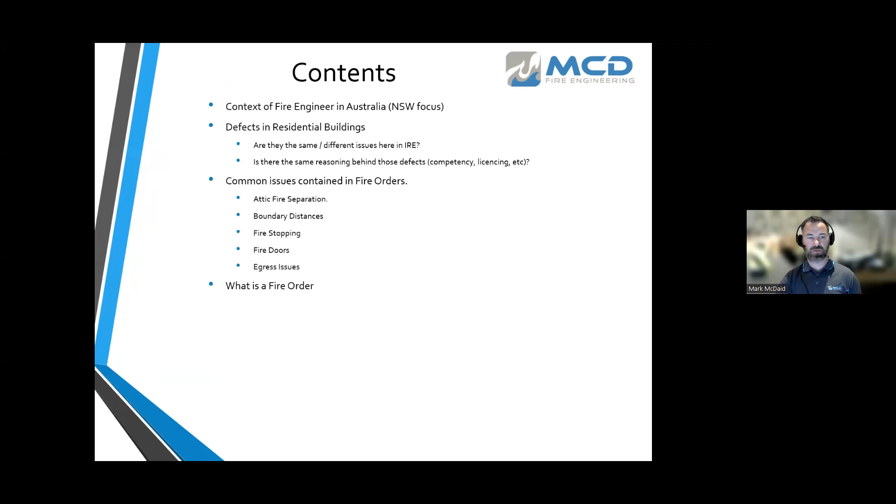At top level: attic fire separation, boundary distances between buildings, fire stopping, fire doors, egress issues. We'll look at what an actual fire order is, what's in a fire order, and how and when one might receive a fire order.

What if everything complies with the original as-built docs? What do we do in those cases? What legislation applies? Can I appeal? Can I ask for dispensations? Can I ask for concessions? And where does the responsibility fall, whether it's a fire brigade matter or a non-fire brigade matter.

And how would one comply with a fire order, and the pros and cons of receiving a fire order? By the very nature of receiving a fire order you'd think they're all cons, but there are some pros. We'll end up with some conclusions.

A little bit about me before we get started: 21 years as a fire engineer, working purely in fire engineering all those 21 years, working as an expert witness in New South Wales Supreme Court proceedings on both combustible cladding and residential defects. Graduated in 2003 at Letterkenny, worked with Michael Slattery Associates from 2003 to 2012, then in 2012 moved over to Australia. A couple of years later, set up my own business called MCD Fire Engineering, and sit on various groups and professional boards as an education and training subject matter expert on the panel that assesses chartered engineers in Australia, and recently just got the CEng qualification for Engineers Europe.

So getting into the context of an actual fire safety engineer in Australia, it's somewhat different to what we're all used to here in Ireland.

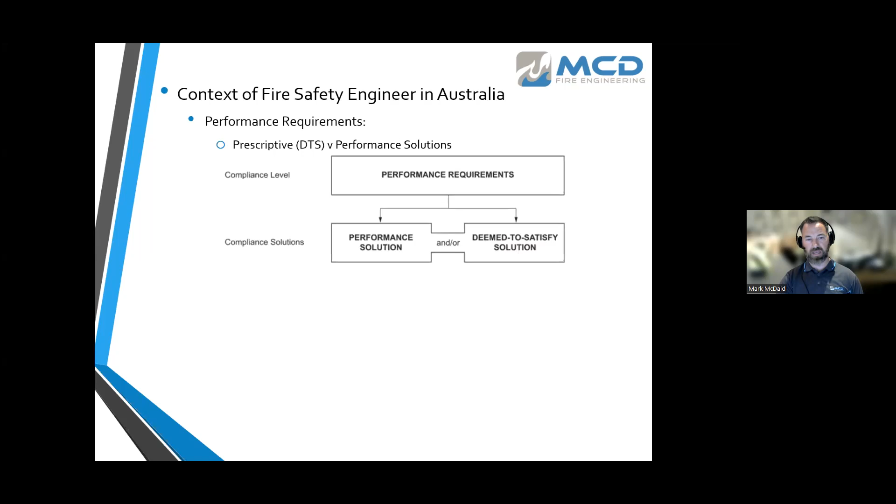To give you an idea of what it means to be a fire engineer in Australia: there are fundamental performance requirements in the Building Code of Australia, or the BCA. Think of it as the collection of all the technical guidance documents from A to M, but they're built into two streams under the heading performance requirements. The two streams, which can be done in parallel, are a performance solution, where a fire engineer is required, or a deemed-to-satisfy solution.

That's the prescriptive path - there's no fire engineering in that. Essentially, when you have no performance or alternative solution, as the old name would have been called, there's no fire engineer, there's no fire service generally, and there's no what's called an A1 unrestricted building surveyor or a signed certifier, because essentially it's considered a tick box exercise. If you comply with the prescriptive codes, it's a clause-by-clause assessment of the building, and there is no need for a fire engineer.

It's a building surveyor's job, but that building surveyor can bring in, at their own discretion, the fire engineer, structural engineer, mechanical, electrical or hydraulics specialist to assure them or give some guidance. But essentially, the role of a fire engineer is purely to do performance solutions.

When it's brought in, we have strict licensing and registration requirements. Fair Trading, which is the governing regulatory body, basically puts us through the rigor every single year in our renewals.

We have a director's ID, whereby if we leave one company and join another, the ID follows us. So if there's any litigation, it follows that director's ID.

There are ICRIT ratings, basically like scores on doors, as they call it in Australia. It's how good a company is or is not in accordance with the eyes of the regulator.

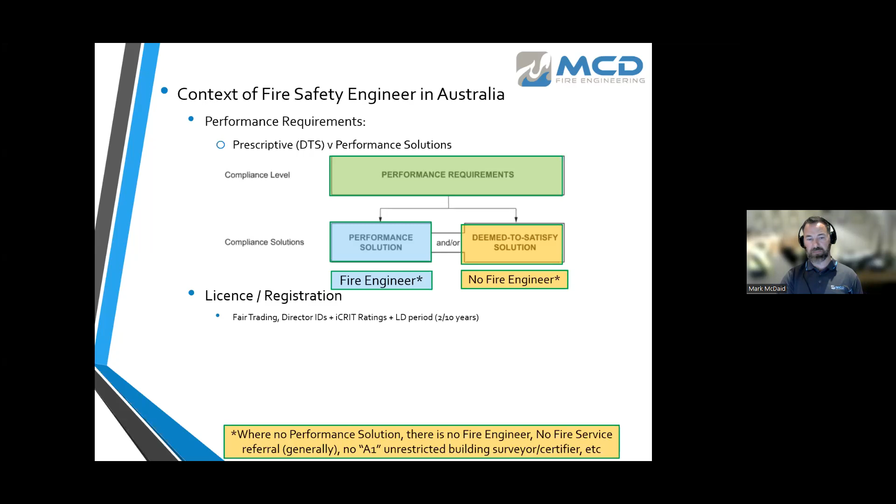And there's the liquidated damages period. For buildings that are built, there traditionally used to be 2 years liquidated damages. Now it's 10 years. The legislation requirements under the EP&A, the Environmental Planning and Assessment Act, and the DBPA, the Design and Building Practitioners Act, specifically for residential, set out that you need to be registered as a certifier, fire safety grade, a design practitioner, and a professional engineer. So it's not just a chartered engineer, you have to register in various other streams, and you have to have insurance.

If you don't have any of those, you simply cannot work in New South Wales. Other states are a little bit different, but you simply cannot work as a fire engineer or open a practice as a fire engineer. That's the legislative requirement, not even a commercial requirement. They're somewhat different and sometimes higher.

The insurance requirement for a fire engineer, both as a company and as an individual, is that you need to be insured before you can do any project as a fire engineer. And that includes that if you retire today, you carry run-off insurance for 10 years.

And that could, if you play your cards right into retirement, you could put it into the coffers of a run-off insurance policy, whereby you pay somewhere 4 to 6 times that last year's insurance.

Now, given the post-Grenfell insurance requirements, my insurance as a company went from 7 to 150 grand. That's a big bill to pay if I wanted to retire tomorrow. So basically, it's a lot of money, and there's a lot of responsibility on your head.

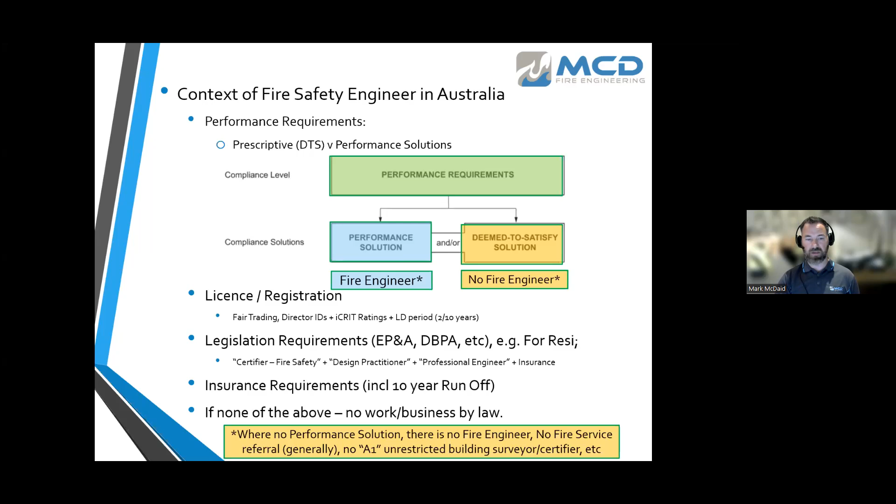So next we look at some of the common defects in residential buildings. Are they the same as they are here in Ireland? Is there the same reasoning? Is it to do with competency of engineers or builders? Is there licensing issues about various trades? And then we can look at whether the route to remediation is best done by the fire order, or what's called a DA, a development application or development approval, which is like a planning permission.

And a CC and CDC is a construction certificate, or for a fit out, for material alterations, it's a CDC. Essentially, that's like your standard fire cert application and commencement notice.

The code of practice for remediation on defects is the Irish reference. We'll touch on that a little bit later. But essentially, when you have a fire order, you don't need planning permission. The council are the ones in control of that fire order process, and they're the ones setting out what needs to be done, how it needs to be done, when it needs to be done, and who needs to be involved in the various stages of that process.

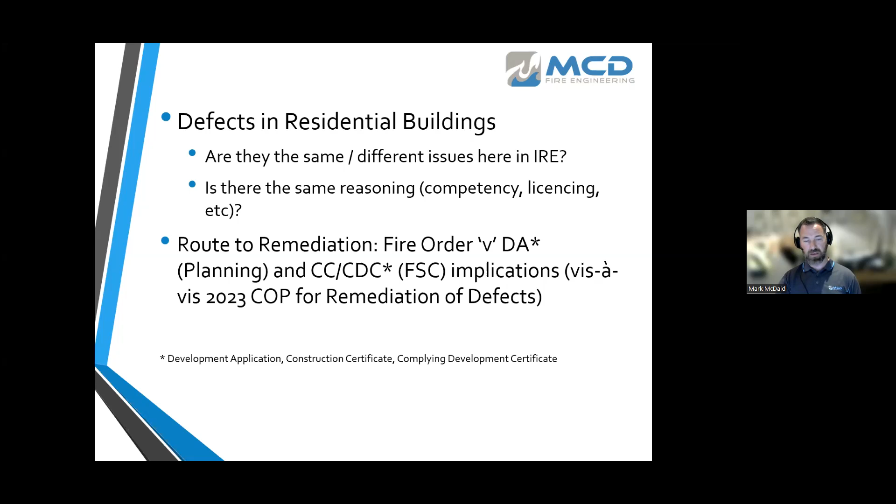So they're very much in control of it. They don't necessarily sign it off, but they're in control of who should sign it off, i.e. a registered building surveyor and a registered fire engineer and all the other registered practitioners that go along with it.

Some of the common issues we'll find are up in the attic at the top floor. The ceiling is either not a fire rated ceiling, or it's interrupted by internal non-fire rated partitions. So you might have bricks and blocks between the units, but internally you might have bathrooms and bedrooms that are not fire rated, and they actually go through the fire rated ceiling.

So you've got an interruption of the fire rated ceiling, and the way it's worded in the Australian system is throughout the entire top floor. That needs to be one uninterrupted ceiling throughout the entire top floor. So if you don't have a fire rated ceiling, quite often the walls are not extended up to the underside of the roof covering, the sheet itself, not the battens or anything else.

The only thing allowed to pass through those walls is a timber batten, nothing else. Fire stopping is pretty much the same here as it is in Australia. There are problems with fire stopping all the time, especially in old existing buildings.

Boundary distances or fire separations: houses in Australia typically are 900 millimeters to their boundary, whereas non-domestic buildings, so flats, apartments, 3-story walk-ups or even 10-story buildings, have a minimum requirement of 3 meters to the boundary. It doesn't matter how many windows are on it. There's no such thing as enclosing rectangle methods, BR 187 or anything else. It's simple: if you're within 3 meters, you fire rate the windows or provide drenchers or shutters, or else you do a fire engineering solution to justify not doing it, or as a reduced form of protection.

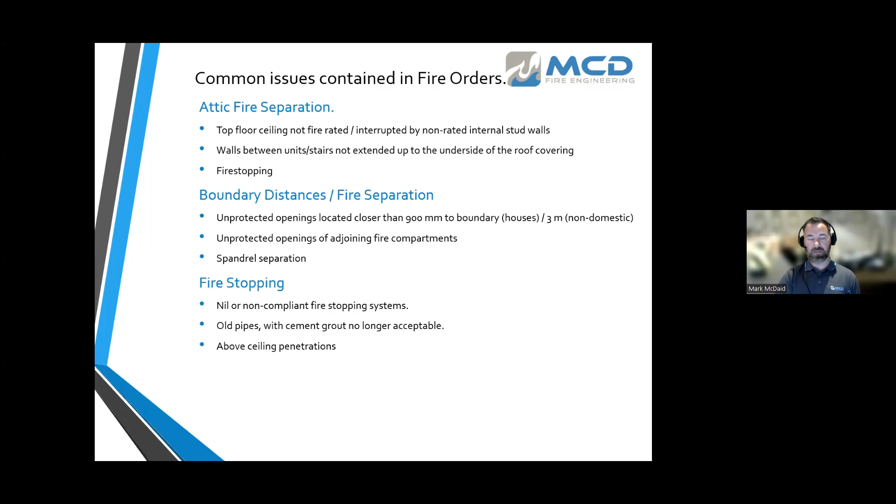Fire stopping, as I said, is always there. It's always one of the defects we pick up during our audit process. So it's either non-existent, or non-compliant, or old pipes in old buildings with cement grout and sometimes paper backing to stop the cement falling out, which are no longer acceptable. There's often quite a lot of above-ceiling penetrations that subcontractors think you'll never see, and then we'll show you some examples where we do see it, and it's pretty bad.

Fire doors: the common issues, both in residential and non-residential buildings, here and overseas, are gaps, clearances, rebates, hardware, tagging, modifications, and not having the right test reports for any of these. They're not installed in accordance with the test report. In Australia there's a very exacting term: if you've got a fire rated system, whether it's a firewall, fire door, or fire damper, it has to be installed exactly as per the tested prototype. No variation. So you can't accept a fire rated system in a gyprock wall going into a masonry wall and vice versa.

Egress issues, common issues we usually find, are clearances in stairs. They're required to be at least a meter wide. They might be built for 900 population, or there might be more than 100 people using a single exit, which is usually not allowed. Inward opening doors, travel distances, and escape past windows - all the kind of stuff we would commonly see anywhere, really.

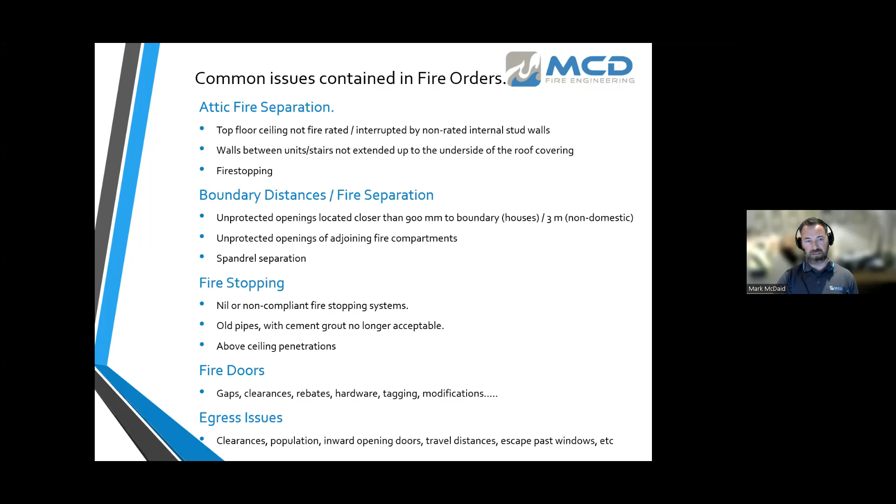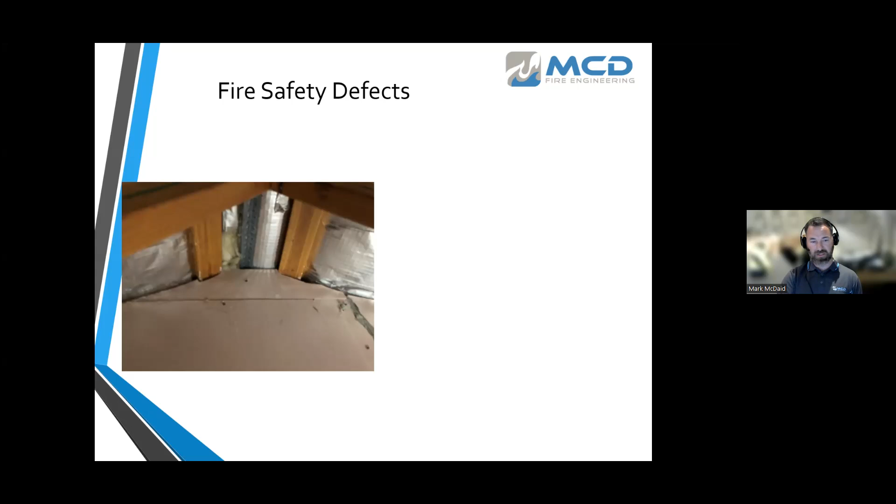Some of the fire safety defects: up in the attic there's an attempt at putting in fire rated plasterboard in a very bad way and not fire stopping it correctly. That silver foil is what they call in Australia sarking - we might call it felt over here - but essentially there's insulation above that sarking, and the actual corrugated iron above it is another 50 to 60 mil away, so again that's not acceptable. The sarking is permitted to pass over it, but only the sarking, not the combustible insulation under the corrugated iron. This is very common - purlins going through fire-rated walls with not even an attempt to fire stop, wrap, or coat it back.

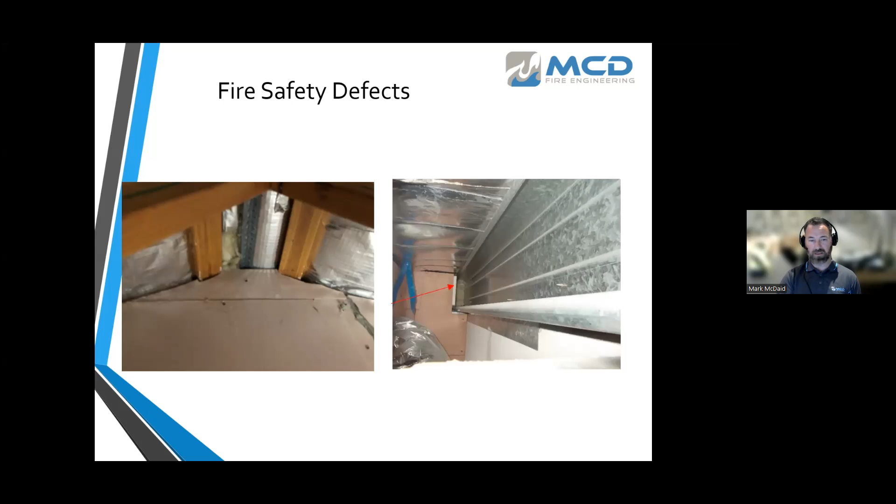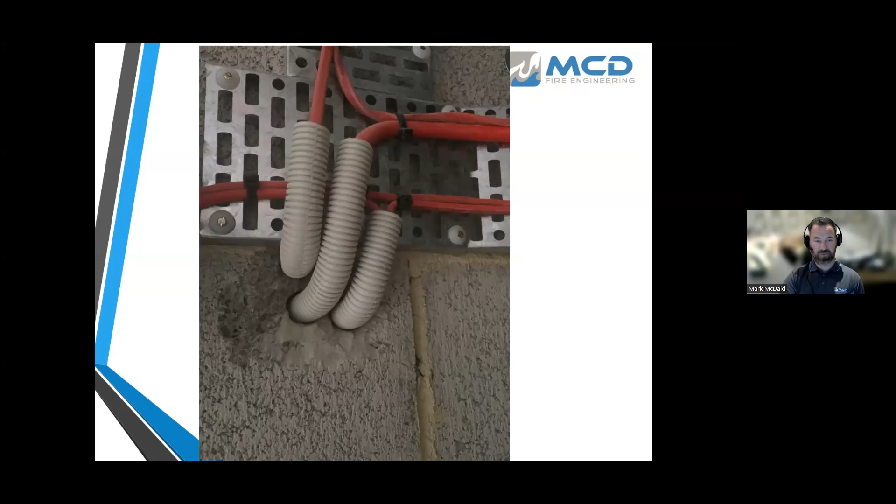Other issues are very bad attempts at putting fire collars in tight junctions, not really foreseeing it or coordinating services. Conduits, flexible conduits going through masonry walls just butchered out of one side and not fitted with either fire collars or what's called volcano-type graphite-based intumescent systems, and a lack of separation between individual penetrations. That one speaks for the obvious - the electrician should have known better on that one. And it's the same with all of these.

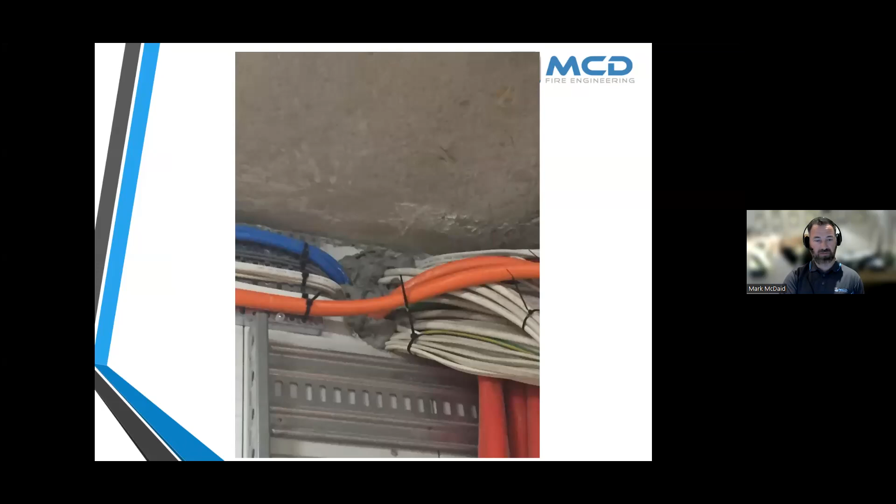Basically these are the same types of problems that we find here in Ireland - they appear to be universal. They've just filled this with a lot of ProMat sealant, and it's not a tested system. Neither is this. We hate to see this pink foam. Once we walk onto a site with pink foam, we're essentially going to the superintendent and telling them to get everyone off the job, into a room, and tell them what they need to do. Because once we see this pink foam, we threaten to walk off the job.

We're not going to sign it off. It's just schoolboy stuff.

This is above the ceiling. Generally, they're above an apartment entry door, where you can see the pipes from the toilets above coming down, and they're penetrating through what's called Hebel or aerated concrete. These are like 75 mil aerated concrete, a lightweight concrete panel system. You can see there's an attempt on the left with the ProMat canister collars, but a very bad attempt at sealing the wall.

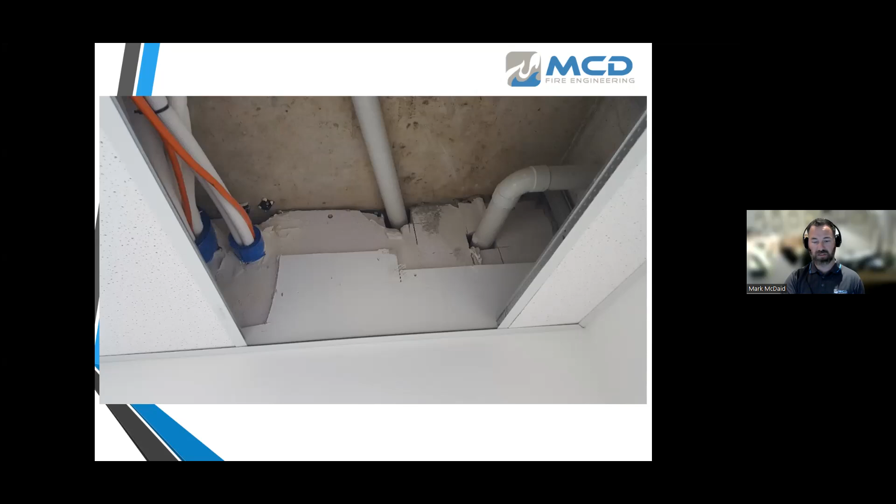And then they've just butchered the wall with the PVC pipe penetrations. Same with this, we've got a fire collar above there somewhere, and the requirement from the fire collar manufacturer is that you need at least 20 mil clearance for the heat to get in above that, to allow it to heat up and activate.

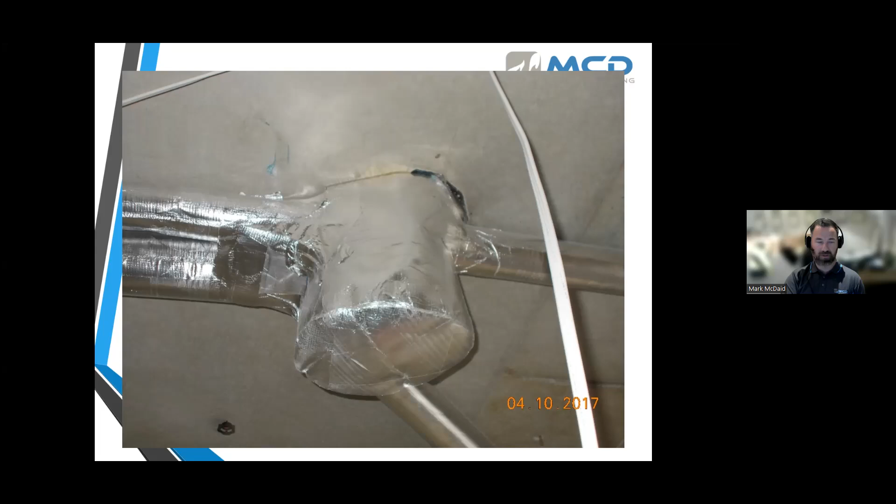Now the conflict here is there's energy requirements about heat loss and everything else, so there's a bit of a conflict between energy and fire. So what do you do? Do you leave the 20 mil gap and forget about the energy or heat losses? There's always going to be a conflict with that.

This is an example of a very bad attempt of vermiculite being used at a penetration of a steel beam going through a firewall and the purlin up above it. Again, same issues that we see all the time.

This guy went to the trouble of patching a hole, only then for the electrician to come back in and just put another 2 cables in the top and do a really bad fire stopping job of it.

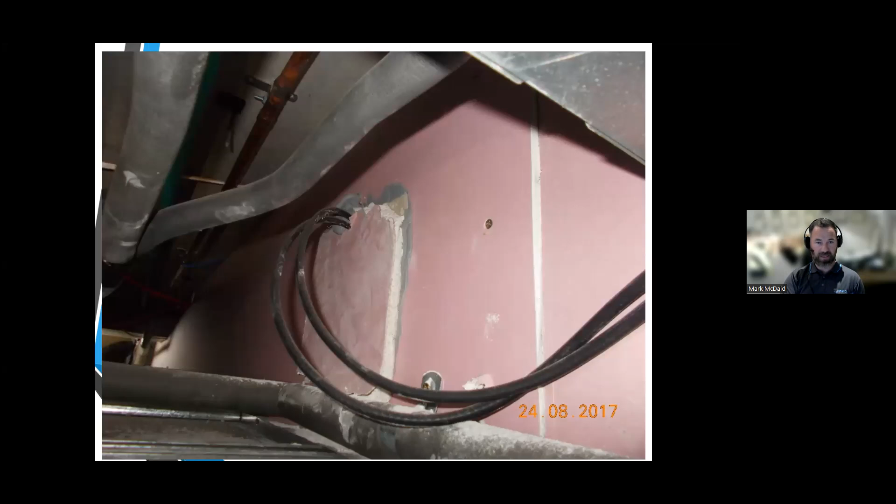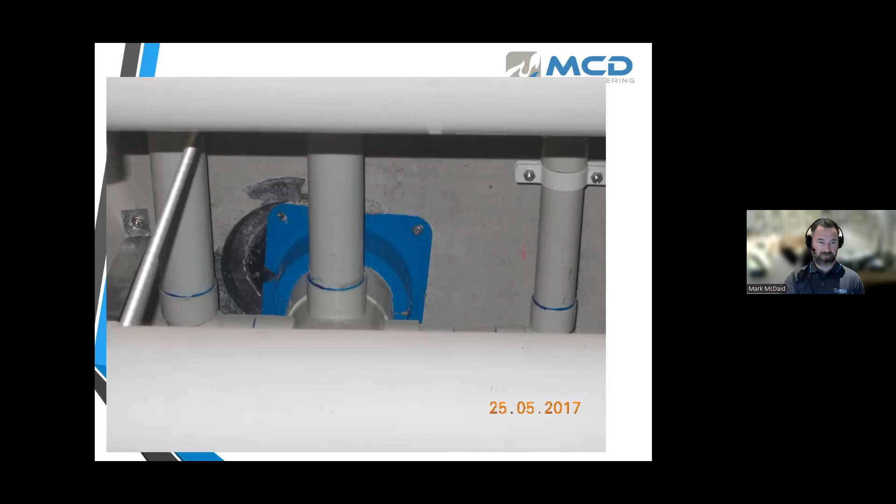Again, fire collars are often installed very, very badly. This should have been coordinated, should have been cast in, and then the retrofit was just offline and really bad.

This is looking through a typical fire-rated stud wall. You've got 2 layers on the near side, and in the very bright white where the green and yellow cables are, as well as the 2 layers at the back side. So they've just core holed a massive, like 100 mil diameter hole for these couple of cables, and didn't do anything about it.

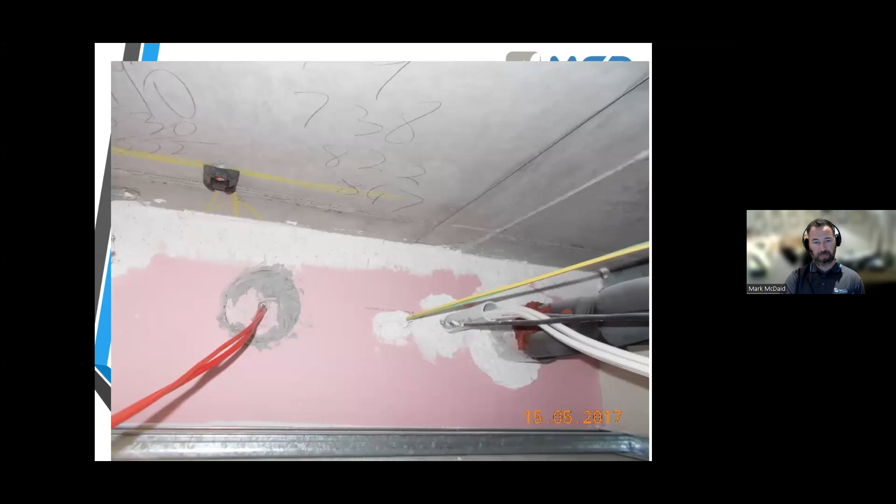And this is above the ceiling. This is from the other side of that wall, where they made some attempt to do it, but again, it's not good enough.

PVC pipes going through the same walls, bad attempts at filling up. This was literally just the cap end of a PVC pipe sitting about 10 mil behind this ProMat mastic. So they didn't even hide the fact that it was a bad job.

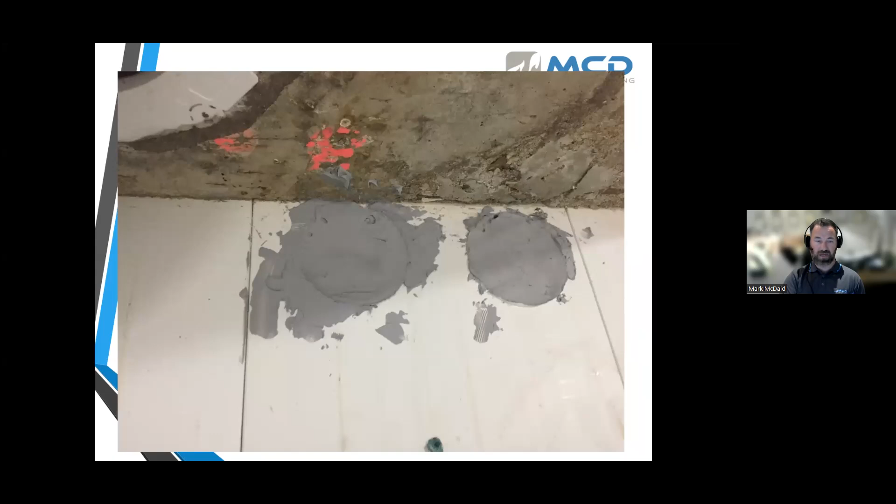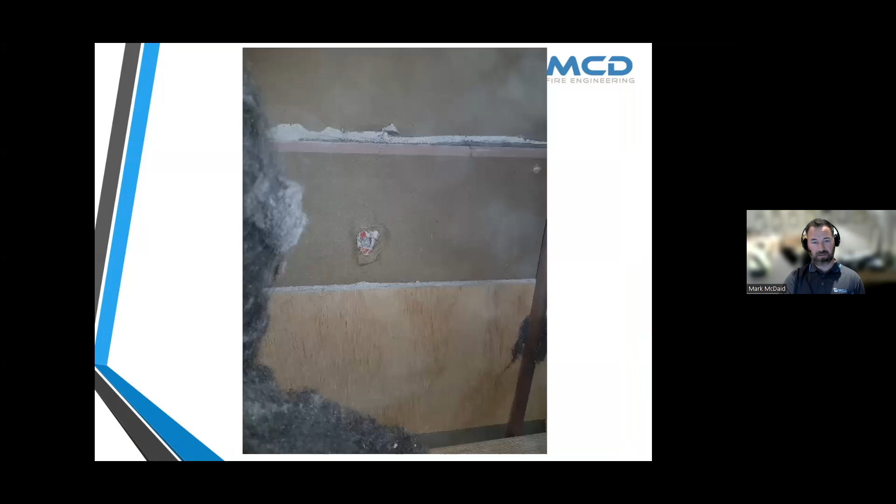It was just brutal. This is a bad attempt at putting in a lintel over a fire door using timber, which by default is not allowed. You're not allowed to use combustible material in fire-rated walls, and there is combustible material inside that fire-rated wall as well.

This was the same wall where that timber lintel was, and this was because they didn't have room to put in a fire-rated door frame. They just decided to put a bit of angle iron and chop the door up a bit and throw it in there, thinking again they could get away with that and call it an access panel.

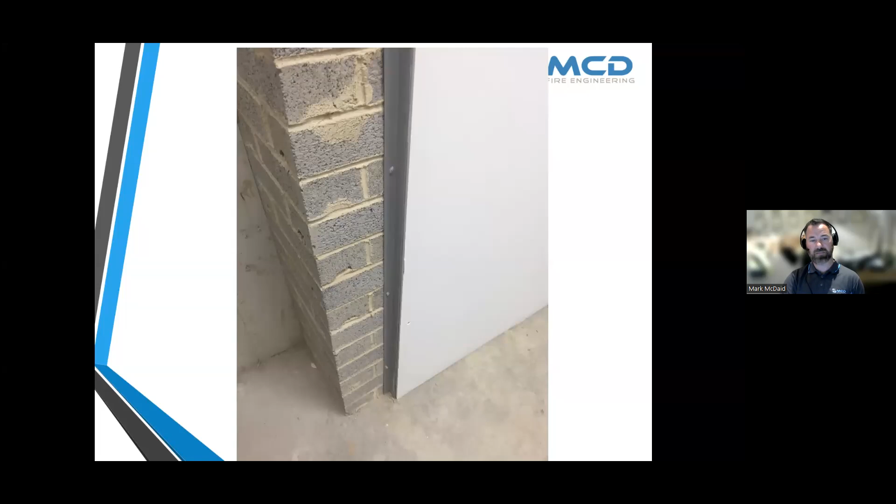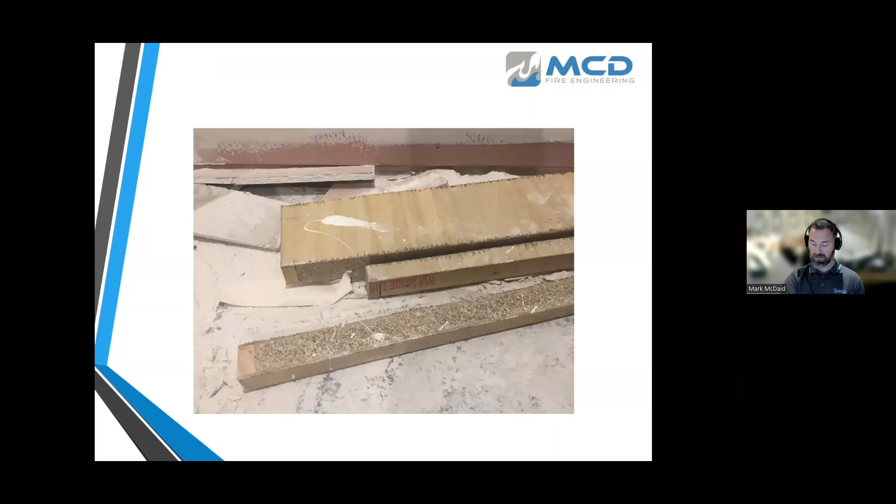This is the same builder, same problems. This is a fire door that they put into a penthouse that they modified after the fact, and decided the door was too big that they had left over, so they cut it up, chopped the head off, chopped the sides off and everything else. We were like, guys, this is just no good.

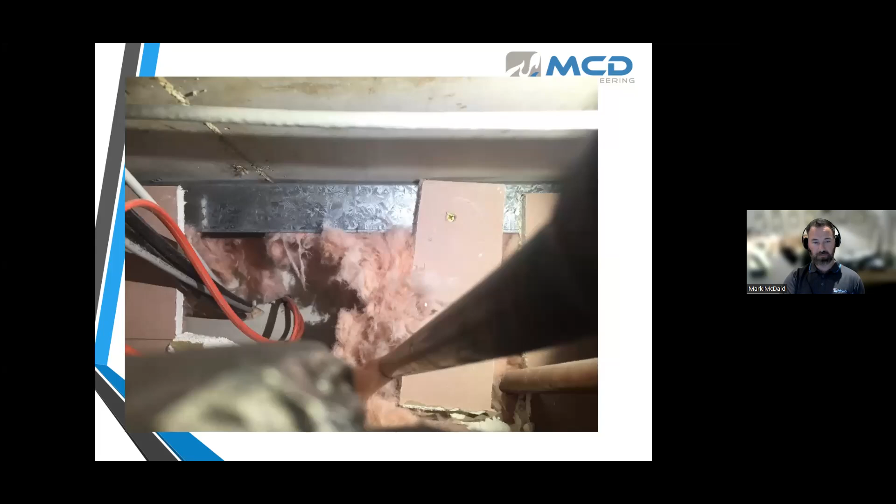And then the really bad, obviously they don't even care. A lot of this is one screw and let's just throw it in there. I don't know what you're thinking as a tradie, thinking that you're going to get away with this. Quite often this is what we'll see in very, very bad jobs, including putting in intumescent fire dampers with mastic only, not fixed, and not even in the fire-rated portion of the wall.

Whereas we get into the kind of stuff that can be done right. This is at the commissioning stage of a 40-story student accommodation building, and this is people who take pride in their work.

In terms of the wrapping, this guy didn't actually need to wrap all those cables the way he did, even though that was a fire-rated wall behind that was going into it.

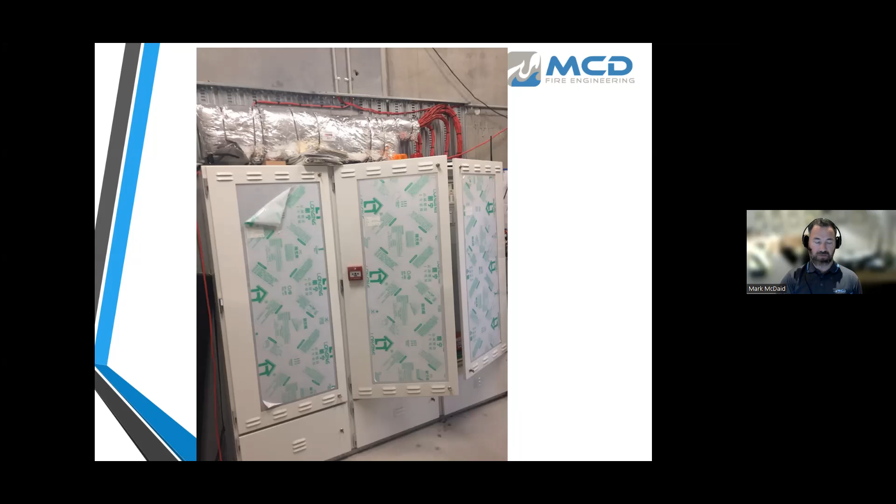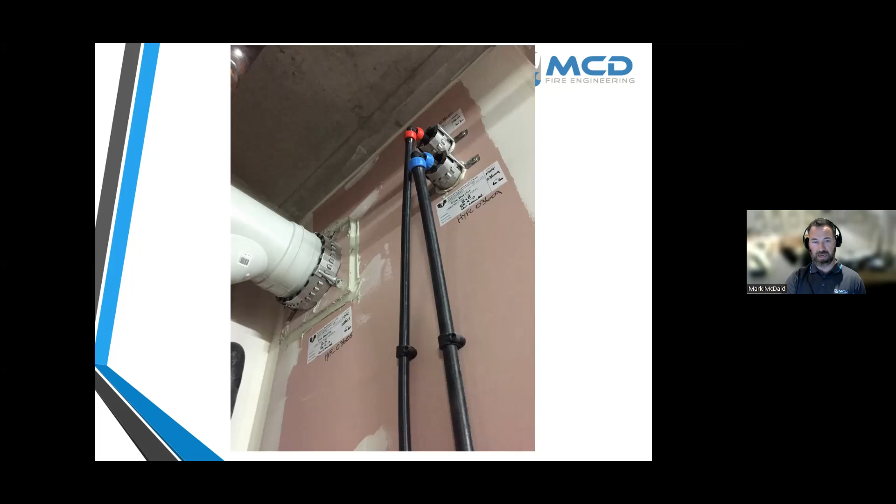There was a concession because this is a highly sprinklered building, and it was between two spaces deemed to be sterile or relatively sterile. But equally, everything was well tagged, badged, with fire stopping, fire collars, names, labels and IDs on not just the fire dampers but everything, and they've got a register for all of these. It just shows you when you walk through a site and see this from the get-go, you can sit back a little easier. I won't take my eyes off things, but I have more confidence in the trades going through this building, and you're not as frustrated at the end of the day.

So going into what a fire order is, we find there are loads of problems. The EP&A Act, the Environmental Planning and Assessment Act 1979, basically requires that council have a duty of care to respond to any complaints related to fire safety, and almost always, in my experience, they do respond. These can come from a member of the public or other departments such as the fire service, because the council is the authority having jurisdiction.

Once a building is occupied, within their local authority, the council is the authority having jurisdiction, and as part of that early stage, they can seek an audit or assessment, or actions or undertakings to get submission of documentation or other evidence to determine whether the building complies or not. These are issued under the 1979 Act, so it's been around a long time. There are various types of orders - unless it's an emergency order, and we have something similar in the Fire Services Act here, all orders must be preceded by a notice of intention to serve an order, setting out what you must do and the time frame to do it. That allows owners or representatives to give representations before an order is officially served, but it usually is - converted from an NOI, notice of intention, to a formal fire safety order.

In Australia, this is how a fire order would come to fruition - basically captured under three columns or tabs: to stop, or to do, or to stop doing things for the sake of fire safety, or to simply stop an activity on the premises. So it might be a compliant building, but what you're doing in it is not compliant - for example, setting off fireworks - or to stop using the premises entirely, because it's in such disrepair that it's not occupiable.

It's not safe to occupy. In what circumstances? It basically explains that fire safety is inadequate, or the activity is life-threatening, and then the final one is when order item number 1 or 2 is already being served and nothing has happened, and it sets out who you can serve them on in each of those occurrences.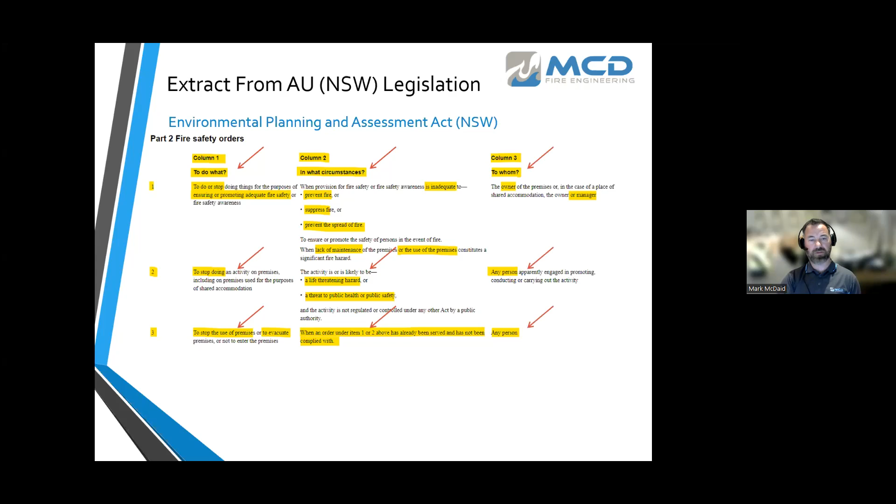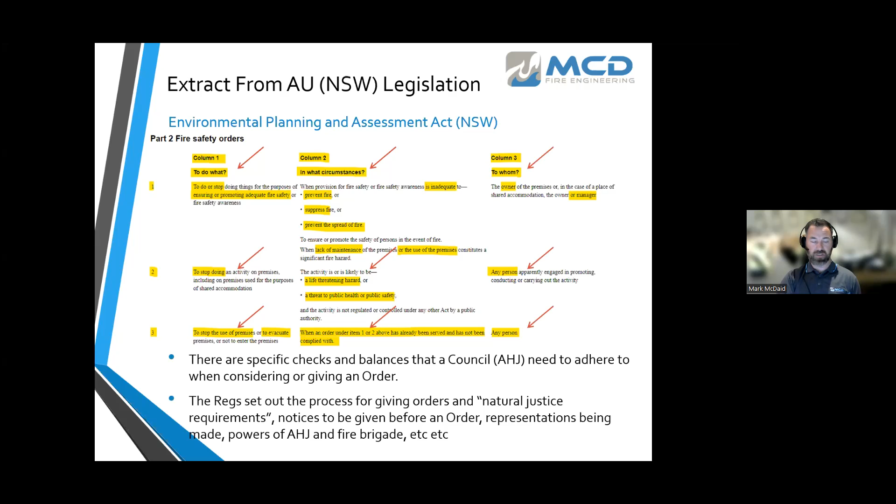There are specific checks and balances that a council, the authority having jurisdiction, need to adhere to when considering or giving an order. It's not as simple as giving it out. They have to pass certain checks. And the regulations set out that natural justice requirements must be preceded with notices to give them representations.

So some of the extracts from the legislation itself: do it, can they be forced to do it, who pays for the work, recouping the costs, involvement with the fire brigade, and so on. When read along the Fire Services Act, the Building Control Act, the Safety, Health, Welfare at Work Act in Ireland, and the Code of Practice of 2023, they're pretty much covered like what we have in New South Wales.

So usually what's in the fire order, you'll have the legislation, and the order makes reference to the specific legislation that it's been served under. It'll give the reasons as to why it's been served. Usually it's relating to deficiencies in fire safety as listed. It'll give you the timing when you have to do certain things, and they'll usually start off with some low-hanging fruit.

Like fix the emergency lighting within 30 days, or do something else in 60, 90, or all the way up to 360 days and more. It'll outline the appeals process and what you should do if you want to appeal it. And then the penalties if you don't do it. And the penalties can be quite high.

An owner's OMC or a strata company is essentially a company, and it can face fines of $5 million. Or an individual can face fines of 1 million. So they're quite hefty. And they usually mean something. If you're being served an order, they usually mean something is seriously wrong.

So this was what a fire order looks like. And in green, I've highlighted it to just draw your attention. And basically, this is the first part of a fire order. This is a notice of intention to issue an order. So you're putting the owners of this apartment building on notice that says, we're going to issue you an order to upgrade the building, and that we've outlined our reasons attached to this order.

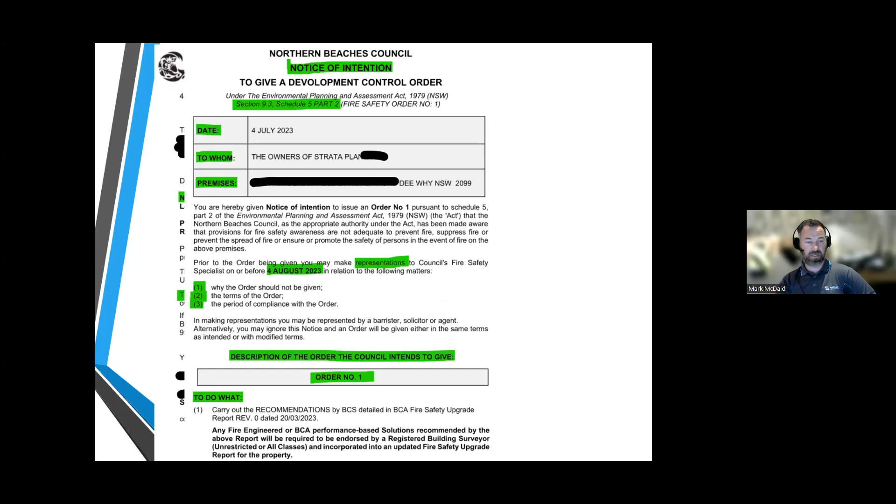And it sets out then what is going to be in that order, to do what, and it's outlined in 2, 3, and 4, and then the reasons for the order, and then the period of compliance with the order. In this particular case, although year 1 and 12 months looks pretty straightforward, they're not always as simple as that.

Usually it's coinciding with a building code audit, and that audit might say do X by year 1, Y by year 2, and so on and so forth. And usually the council will match up to whatever the building code consultant will say needs to be done when it needs to be done.

And it'll also outline what happens if you fail to comply with this order. It's an offense. It's against the law. You have to comply. You can appeal it, and you can go through the appeals process, but you still have to comply with the order.

The lawyers can get involved, and they often do. And quite often when they read these, 9 times out of 10, it's as simple as you need to comply with the order. And in some other cases, it's overly zealous by the council, and they fight back, and sometimes they win, sometimes they lose.

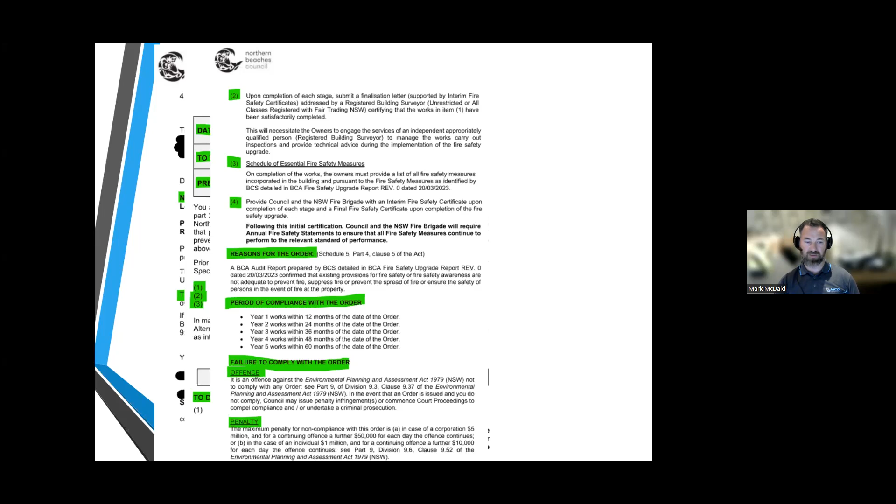And then there's a penalty, as I spoke about before. Then if you fail to do it, basically the council can go out and do it themselves and recoup the costs. And there's part of that process that basically says, if you don't pay us, we'll cut off your utility. I haven't seen it ever gone as dramatically as that, but the legislation has that in there.

So the right of appeal, but then it basically allows you to do all this work without planning permission, without the equivalent of a fire cert, without any of those.

But there are certain conditions, you can't block roads or cut down trees and do other things. It all has to be as per the specific scope of works set out in the order.

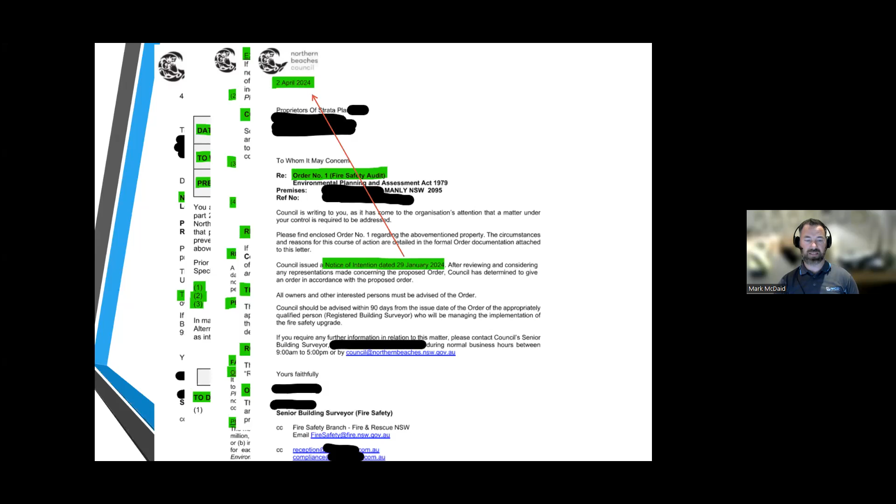This is one that was converted from a notice of intention, and two months later it was served as an order. This particular order, from a different premises, basically said you need to audit your building. So it was just made aware of a problem, and all it said to the owners is audit your building. That usually means get a building code official to audit your building from top to bottom, and have them write a report that says where you're deficient and where you're going to fix it, or whether you want some concessions. And if you're going to do performance or alternative solutions, you need to set it out, and it needs to be done by an accredited professional.

So in what circumstances would you receive an order? It could simply be a member of the public complaint. It could be a tenant of the building.

We had one where the tenant complained that his rent went up, and he called the fire brigade or the council and said, oh, my smoke alarm isn't working. That turned into a 2 million dollar exercise, because they came in and they had all these professionals and costings and everything else. And it was an old building, built in the 60s, so it wouldn't comply with contemporary codes. He realized his error and was like, oh no, can I withdraw that? No, the horse has bolted.

Failure to furnish what's called an annual fire safety statement renewal on time. Every single year in New South Wales, you have to furnish your fire safety schedule, which is a list of all the fire safety systems in your building, to confirm that they were checked that year at the right intervals, whether it's 3 months, 6 months, or 12 months. At each annual renewal, you send a copy to the local council and a copy to the fire brigade. If they don't receive it, you'll get an automatic notification that it wasn't received, and you'll get some time to fix it up. If they still don't receive it, you're essentially issued an order.

They might have an ad hoc inspection. Council might be there for a chance inspection responding to a local flood event or anything like that. Or there's a defects claim on the building. Sometimes owners get a little disgruntled at the builder not having done their job correctly, and will issue court proceedings against them. Council becomes aware of it by default, and then they issue a fire order to update the building to a better standard. Basically anything.

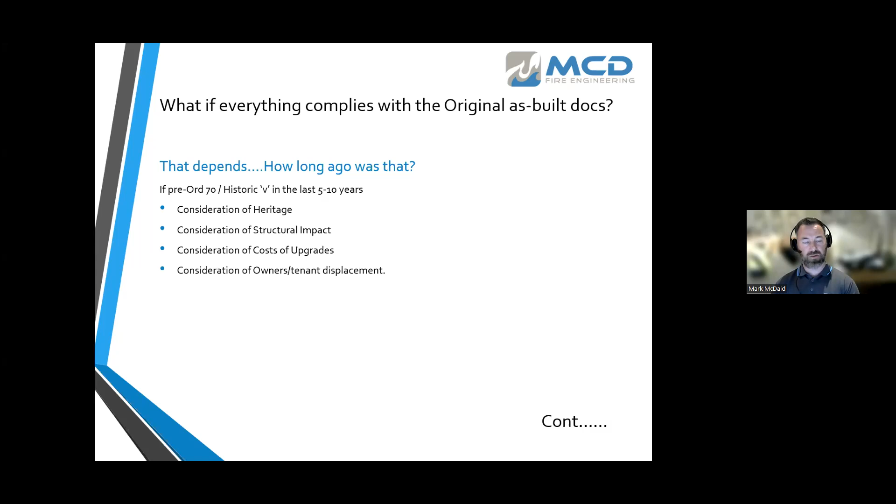Even if you can demonstrate that your annual fire safety statement, the list that goes in reception of every building, is being kept up to date with the standards listed, it simply means you're meeting that standard of compliance, whether it was built in 1970, 1990, or 2000.

It doesn't mean that you comply with the current code. And it certainly doesn't mean you're absolutely safe, because just because you're fire compliant doesn't mean you're fire safe. That applies even today. There's no such thing as absolute safety, it just means you're satisfying compliance with the regulatory code.

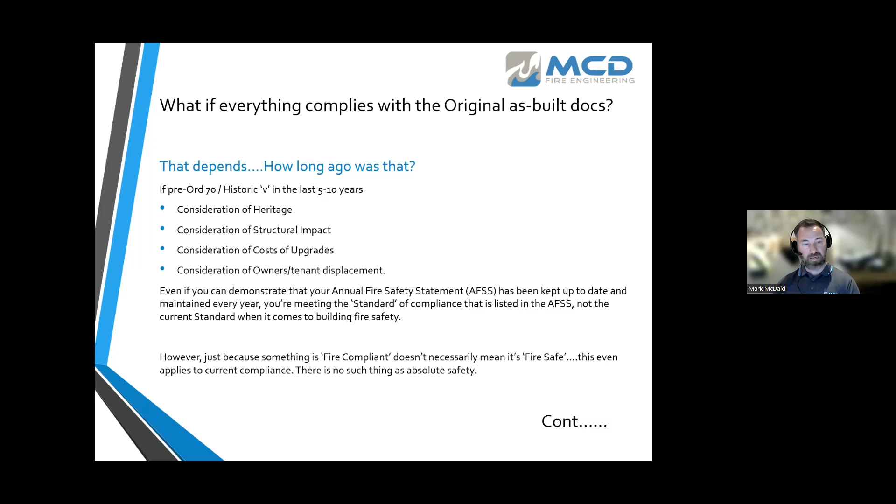Where are the as-built drawings? That's a question often asked, and I see it in the fire safety assessments and fire risk assessments in the Code of Practice here in Ireland 2023. There's often quite a lot of gaps with little or no documentation on older buildings, which requires a more detailed gap analysis or audit, where every man and his dog goes through the building - mech-elec, hydraulic, structural, builders, the lot - checking what is or isn't in the building.

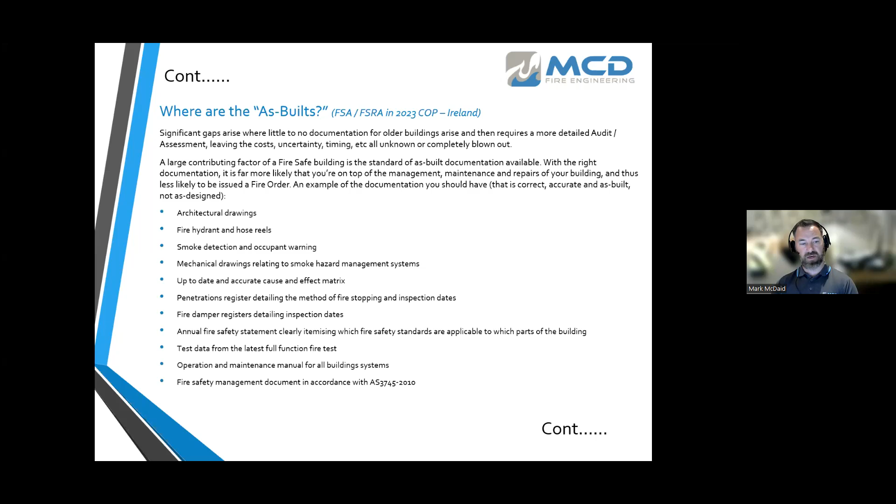That's a large contributing factor to fire safety standards in buildings - the level of documentation available. Older buildings traditionally don't have a lot of documentation, more modern buildings do, but most fire orders relate to older buildings, such as architectural drawings and all the fire safety systems, penetrations and dampers. There's a lot of information today that wouldn't have been around 20, 30 years ago, where these buildings are being subjected to a fire order, much like the Celtic Tiger era issues we face today.

A good example of this issue in Australia - I don't know exactly when it happened - but the effective height of 25 meters is a big thing. Essentially it's like the over-18s or over-30-meter rules. Once you go above 25 meters in Australia, you need two stairs, sprinklers, stair pressurization, and a whole load of other fire safety requirements, sprinklers being one of them.

There used to be a Height of Building Act that said up to 42 meters you're okay as long as you sprinkler the basement and ground floor only, and put in a certain amount of detection on the upper levels. A building today wouldn't pass that, and often a fire order is served because a building at 42 meters doesn't have sprinklers, whereas today it would be triggered at 25 meters. So the council often retrospectively asks you to put sprinklers into a building that's not more than 42 meters, but over 25. That's sometimes a huge ask.

Usually that's where we get involved in negotiations with the council. Sometimes we say that's the only option, other times we don't. Stair pressurization is again related to height - sometimes these old stairs aren't pressurized at all, or just have an injection system at the top, without the same requirements or acceptance criteria that exist today, where you check for a certain flow rate across the door, certain pressures inside and outside the space, relief valves and everything else. So they often ask for that to be overhauled, which is sometimes easier than it appears.

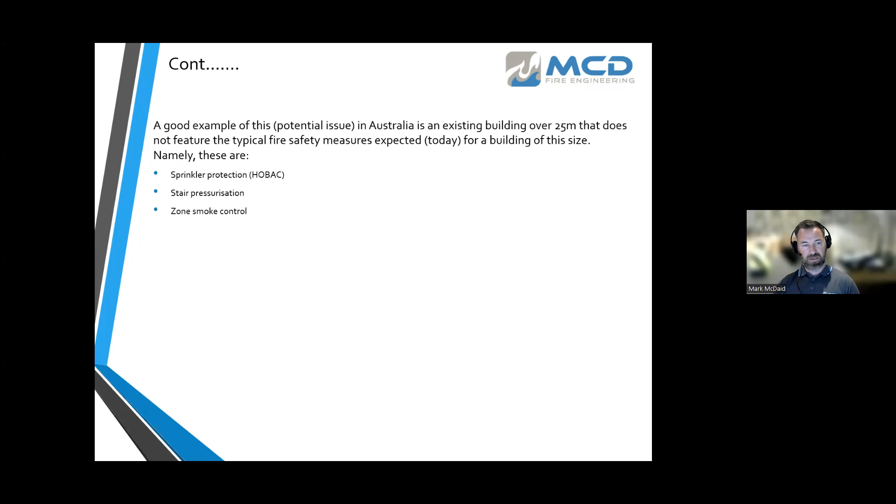Zone smoke control, basically pressure differential systems and sandwich systems, has occurred in the last 20 years but wasn't there 30 years ago. In these old buildings - I'm talking about buildings more than 30, 40 years old - they usually have some hydrants, hose reels and extinguishers, and that's probably it. They don't have a lot of detection or alarms.

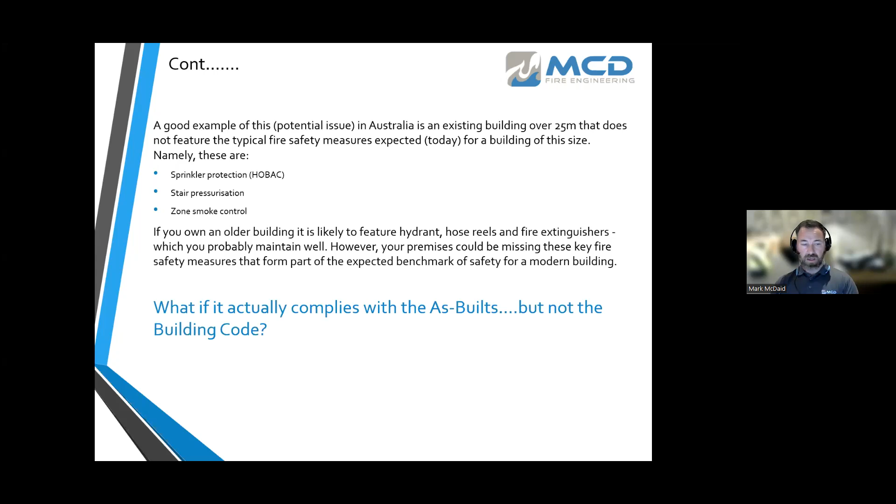Quite often that's where the council will say, now it's time to bring your building into the modern world, but we're not going to hit you with everything. We basically want you to get a building surveyor and a fire engineer to come up with a fire safety upgrade strategy, bespoke for your building. Then the question often asked is, what if it actually does comply with the as-built but not the building code?

Well, that's simple - once a certifier issues an occupation certificate that's in contravention of the building code, they're going to get sued. So all the builders and professionals on that will very quickly face litigation, entering into a long, very protracted set of court proceedings, which we've seen and been involved in time and time again, where a certifier and fire engineers have signed off on something they should not have signed off on.

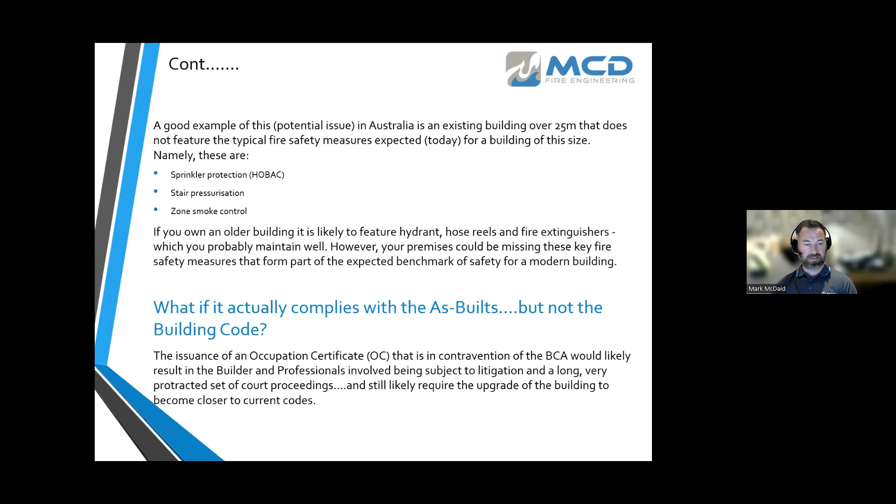And that's why there's insurance, and that's why there's a lot of other protection measures in there. Because in the end, the legislation is written in a way that the consumer is the one to be protected, i.e. the public.

So how do we deal with the fire order? Rough step by step, usually on receipt of the order, we engage professionals: a project manager, a fire engineer, or a building code consultant. We meet with the council, sit down, listen to them. Listen more than talk. A lot of people get their backs up and go at it saying it's not fair, we've never had any issues, we've done all this. It's not about that, the horse has bolted. So just sit back and listen.

The period between the notice and the order is usually 28 days. And sometimes they get legal advice to fight it. Most times it's lost, but it's worthwhile getting it anyway. Then there may be no option but to do performance solutions or alternative solutions, and that's where we come in.

We work hand in hand with the building code consultant, the project manager, and the fire safety officer at council. We'll have ongoing and follow-up meetings with council on site to ensure everyone's in the know as to what's been done, how it's been done, when it's been done. Then we'll seek endorsement of that strategy by council. So we'll develop a report and undertake any engineering analysis that demonstrates compliance with the performance requirements. Usually council will defer to our judgment because we're the licensed ones under the legislation that can only do it.

They're simply seeking our report, which is also checked by a building code consultant as well. Generally, we would recommend audits to be done in the building. As I said before, it could be mechanical, hydraulics, the whole lot. The rectification would be set out, how it should be set out, the likely cost, the time, disruptions. So there's a whole staging of works that need to be done.

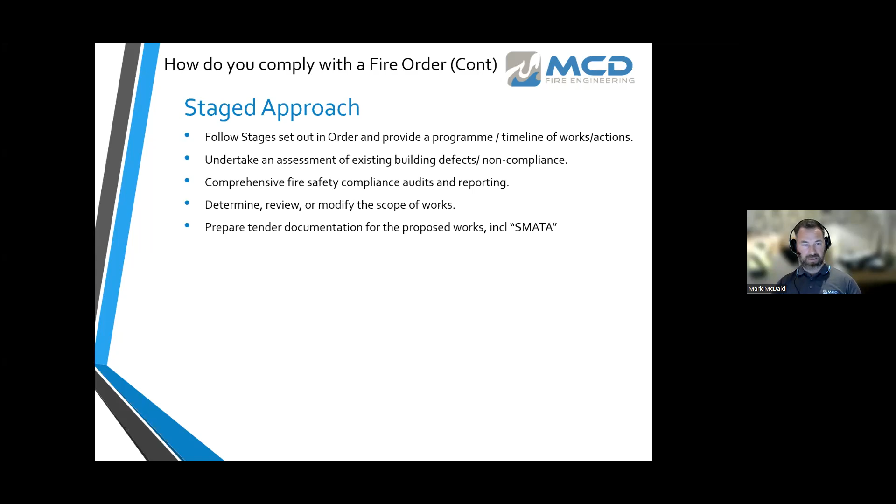So essentially, any Joe plumber or electrician cannot simply tender for the work. You have to be pre-approved through the Owners Corporation management system. That is a regulated system, essentially, to get you on that job.

And usually it means the accreditation or engagement of accredited professionals that are all registered - a registered building surveyor, which is like an assigned certifier acting as a building surveyor, a registered architect, registered essential services, wet and dry, a fire engineer, and you know who the nominated council officer in charge is. That generally is the team you do, and you have a project manager in there facilitating it. Sometimes the BCA consultant will actually do the project management as well.

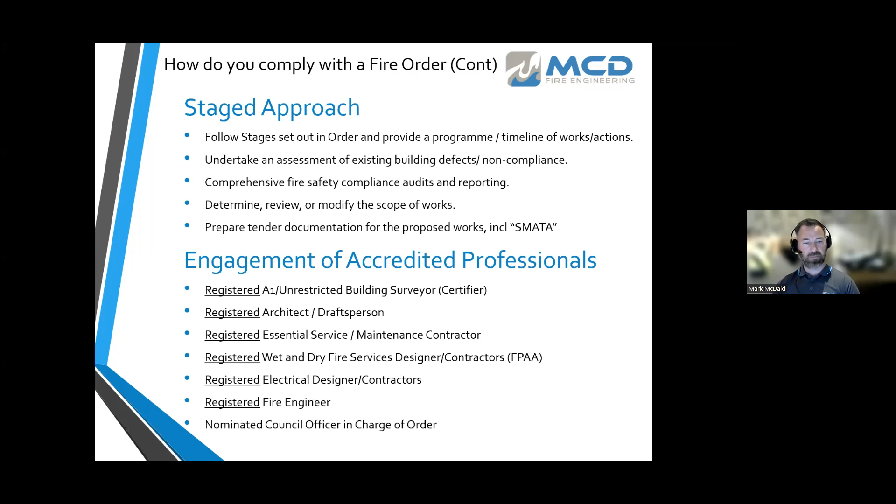So the role of what's called a strata is essentially the owner's management company here in Ireland, but it's called a strata in Australia. The managing agents are people who are regulated by law who manage the OMC. They're an independent body that essentially makes sure that the OMC are doing what they should be doing by law.

They register the strata and the committee members and what they are. They administer the funds and make sure that they're being spent correctly. There's governance and everything else. They vet the tradespeople, their licensing, credentials, and insurance. They appoint the BCA consultants and various trades. And they follow a certain process as well.

So the process, as I said, you'd have a PM review the tender works, meet the stakeholders, on-site coordination with supervision of the contractors, regular updates on the progress and the program timeline with the fire brigade or council. They would issue notices to residents saying we're going to do works between this and that hour, or we're going to need to shut off certain lights or do certain testing, or we'll issue closure notices for the lifts or the stairs during periods of time.

And they'll all work with the strata or the OMC and the managing agent. They'll set out when the commissioning is going to happen, who's going to be there, what needs to be done, and provide the final sign off and statements from all the relevant parties. And then the ongoing consultancy and technical support would come from people like ourselves throughout that whole process.

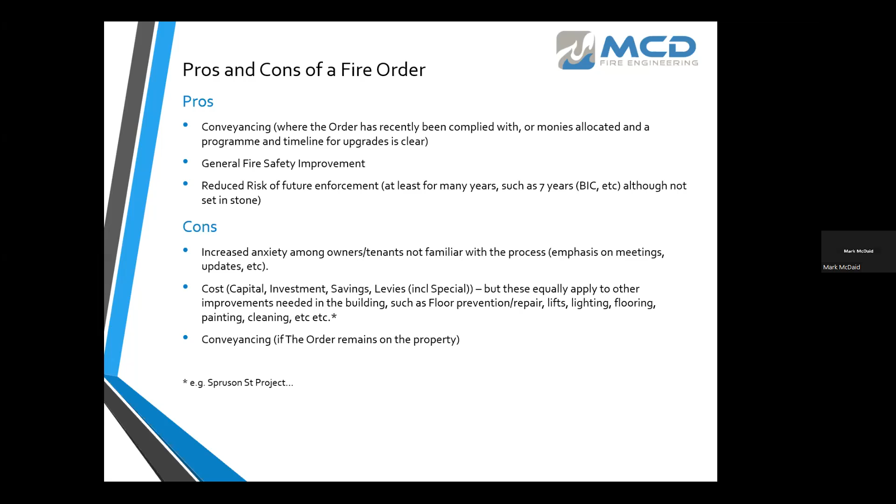So other considerations like heritage, we might have lath and plaster, really old 100-year-old ceilings that are ornate or heritage, which have certain fire resistance levels that maybe only last 15 to 17 minutes, or 15 to 27 minutes. The Heritage Council of New South Wales did some fire tests, subjecting these old lath and plaster ceilings to a conventional fire test as you would have today, and found that if they're built okay and pretty much intact, they might last for 22 minutes. And sometimes that is the consensus.

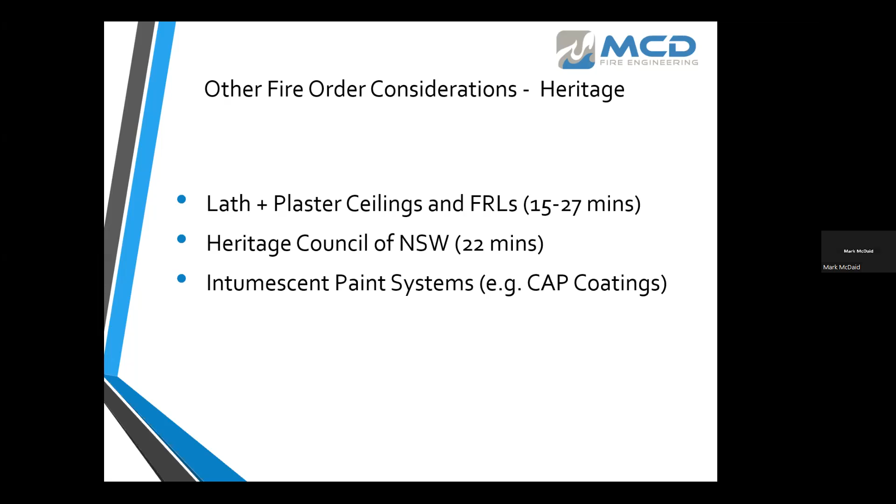We're not touching it, we might put intumescent paint on it, and that's a system regularly employed in heritage buildings. Or in some cases we might retrofit a sprinkler system if it's really bad. Usually it's on the really bad ones that this ends up happening, but not often.

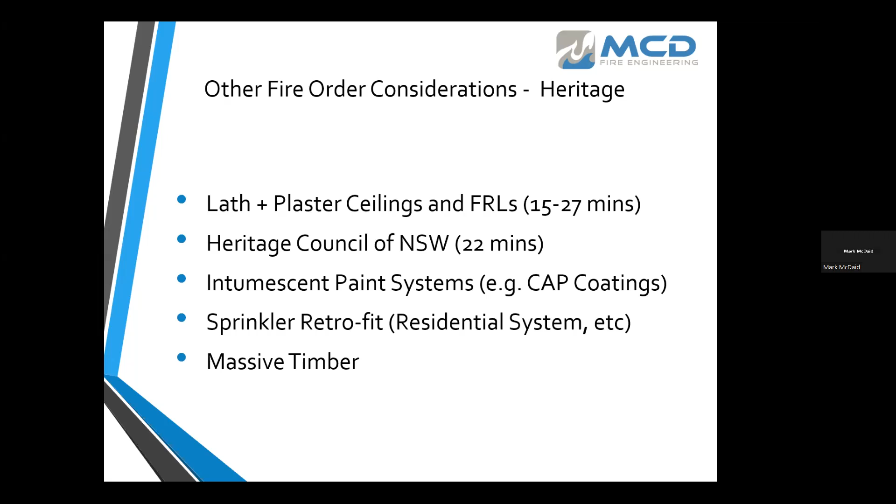Then we have what is called in Australia massive timber, or we might call it CLT - these old buildings that used to be warehouse buildings that are now fancy apartments, which wouldn't be built today in this way, shape, or form. So we end up getting involved in doing charring rates and analysis about how long that column will last in a fire, reinforced in there with some steel as per the structural engineer's recommendation, because the joint connection in there wasn't going to survive much more than, say, 20 minutes.

So the recommendation there was to apply some intumescent paint, and the columns would char for 60 minutes and still have structural stability. We were able to do the calculations that show the fire wouldn't burn for much more than 60 minutes by doing fire severity calculations.

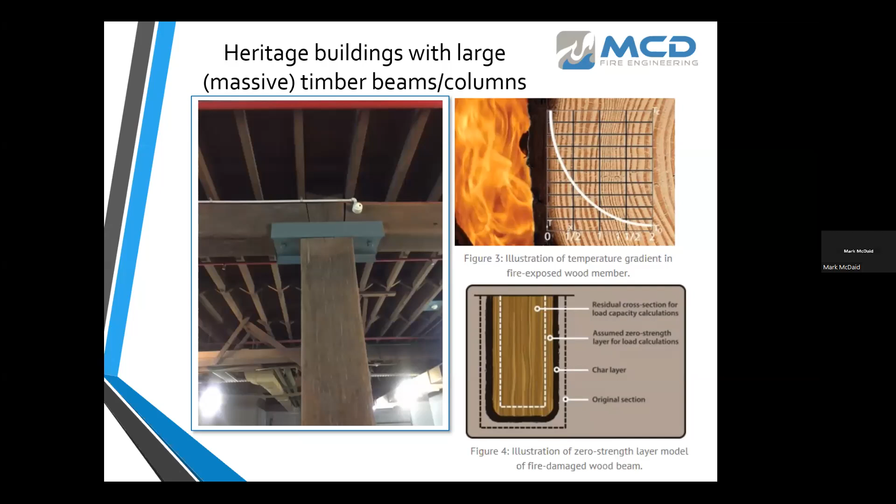Coming into the final slides, the main point here is to talk to the experts, engage qualified chartered fire engineers, follow published codes of guidance, like the Code of Practice for Remediation of Fire Safety Defects here in Ireland. Get the approved design, specs, test reports and assessments, have competent fire safety professionals for active and passive systems. This applies whether it's a fire order or not, to be honest, but it's the same process as I said before we follow.

Getting the relevant experience in doing fire orders, not just normal day-to-day stuff. Talk to council, keep them informed, keep them updated, let them know that you're progressing, because the less you communicate with them, the more enforcement you're going to get from them.

Having a known and accepted understanding of the process of the fire orders, planning for it, saving capital works fund or the sinking fund, the timelines, knowing what disruptions and how to plan around them.

Having engaged a fire safety engineer, a building code consultant, and project management is probably the consultant that you would have to have on fire order, regular meetings with the OMCs and the fire service and the council just to keep everyone updated, have a fully documented design and specs before you start, rather than going straight into it, having accredited installers of these passive and active systems, updates to the as-builts, including all the certificates and specifications, keep the communications open and continue that to all.